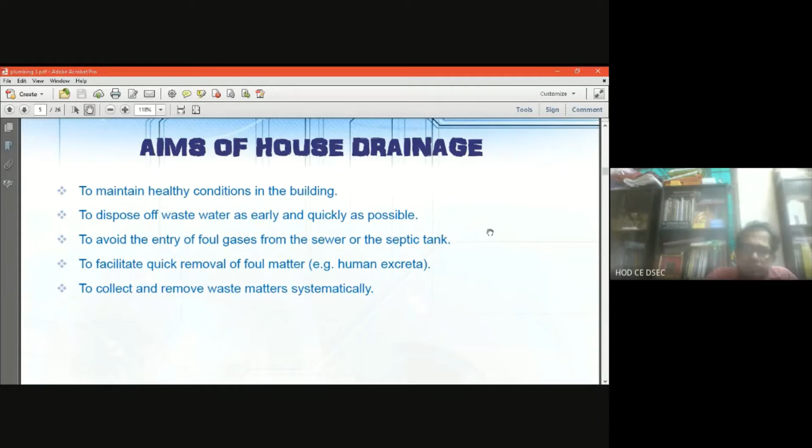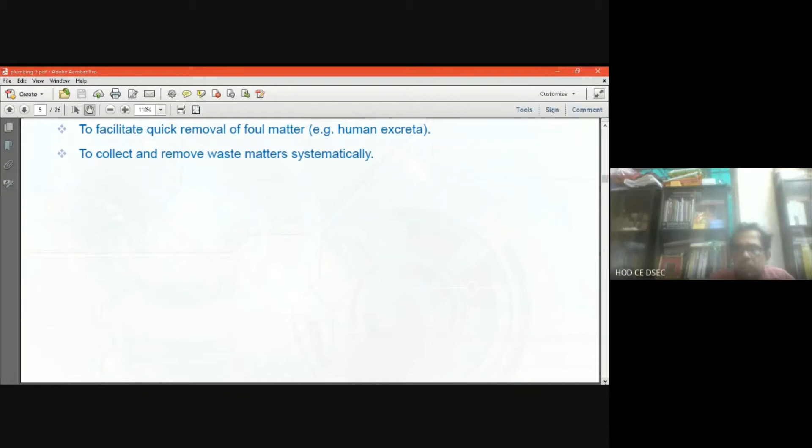Now, to facilitate quick removal of foul matter, such as human excreta and wastewater, through the plumbing facility, removal of this excreta material or wastewater takes place, to collect and remove all waste matter systematically. And after all, our drinking water is supplied through the piping plumbing system, with valves and fittings. All fittings, fixtures, and piping fall under the single head of plumbing.

Now, what are some principles you have to maintain for house drainage, the plumbing? The house drain system should preferably be laid by the side of the building to facilitate easy repair and better maintenance.

House drain joints should be leak proof, which is very important, because if any leakage is found in the plumbing work, foul gas may be emitted through this leakage. So it is very important that leak-proof joints be maintained, not only in the piping system, but also at the valve fittings and fixtures. Every joint should have leakage prevented.

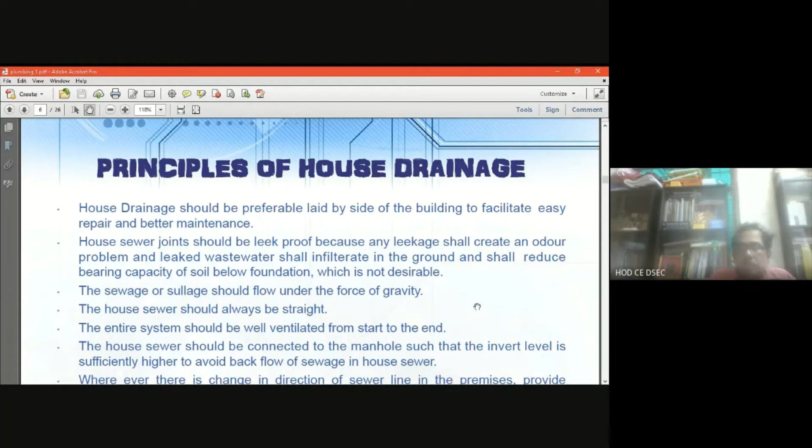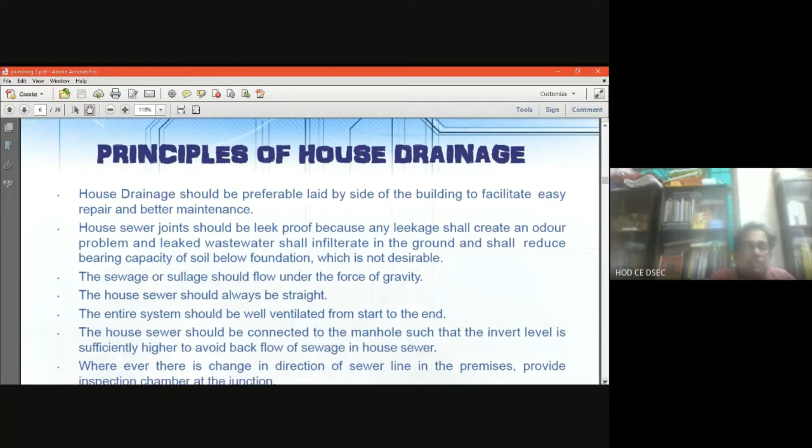Otherwise, this is required for reducing the emergence of foul gases. Now, sewage should flow under force of gravity, and the house drain should always be straight. The entire system should be well ventilated from start to end. This is one of the main principles of house drainage. There should be a ventilator pipe, that is a ventilating pipe system, along with the sewage pipe, because the entire system should be well ventilated from start to end.

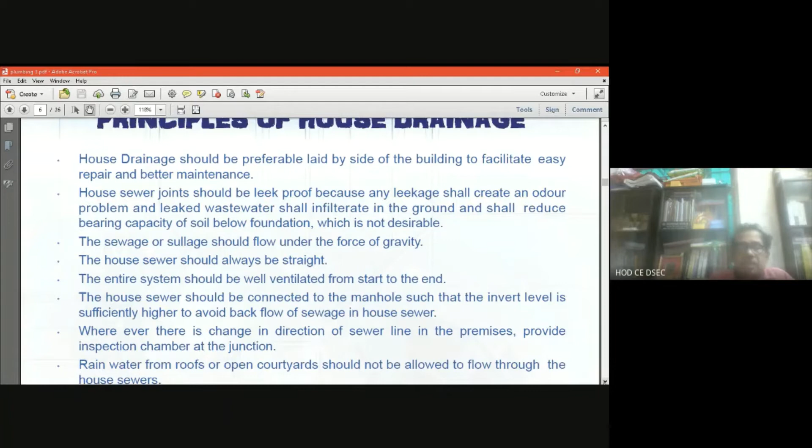The house drain is connected to the manhole or the road drain. At this connection, called the manhole, used for inspection or maintenance purposes, the invert level should be sufficiently high. Why is the invert level maintained high? So that backflow of sewage into the house drain can be prevented. Backflow of sewage in the house drain should be prevented, which is why the invert level in the manhole should be high.

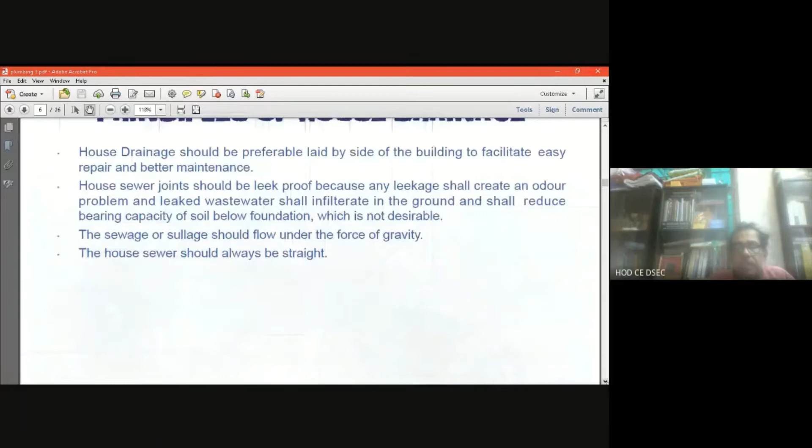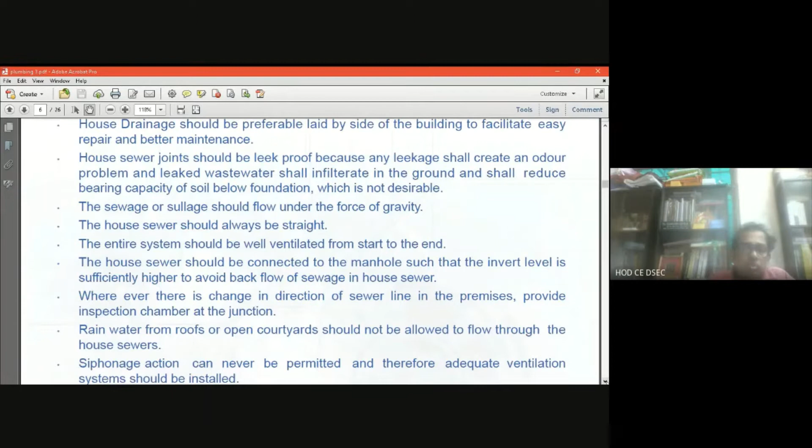Now, rainwater from roofs frequently falls on the roof or open yard. This rainwater should not be allowed to flow to the house drain directly in general, but should be flowed through the rainwater pipe to the gutter provided in the roof. Siphonage action can never be permitted, so adequate ventilation system should be installed.

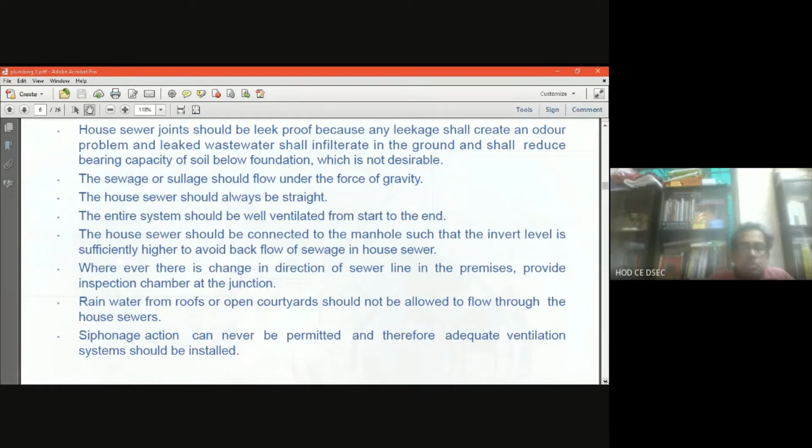So these are some principles I have told you. As I've told you at the very beginning, in plumbing, the main materials are the piping system. Apart from the fixtures and fittings, the main materials are the pipes in the plumbing system.

So we can talk about the soil pipe. What is the soil pipe? This terminology, first of all, you have to be acquainted with. Now the soil pipe is through which the human excreta flows from the cistern.

Now what is the waste pipe? The pipe which carries only the liquid waste and does not carry human excreta. So this is the wastewater, either sullage wastewater or wastewater from the toilet, like WC. This is the waste pipe where wastewater carries from the bathroom, toilet, kitchen, floor wash, and the soil pipe is where human excreta flows directly from the water closet or cistern.

Now what is the vent pipe? This is a very important pipe provided for the purpose of ventilation of the system. The vent pipe is open at top for emerging gases, and at bottom to facilitate the exit of foul gases. It is carried at least 1 meter higher than the roof level, so exit of foul gas takes place minimum at 1 meter higher than roof level, so it will have no effect on our surrounding environment. That is the object of the vent pipe.

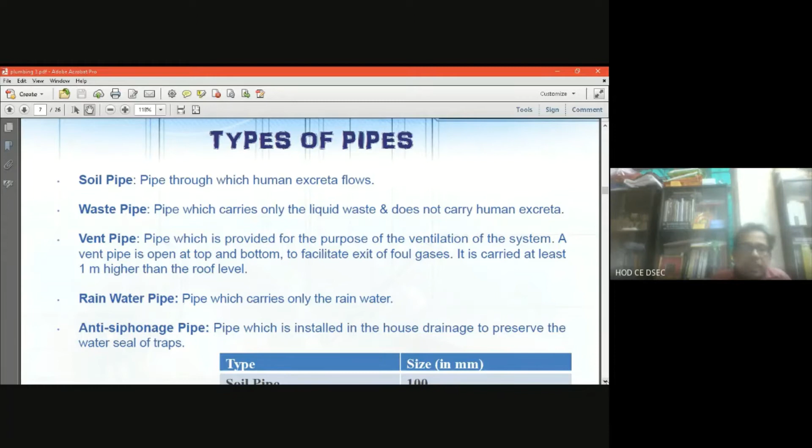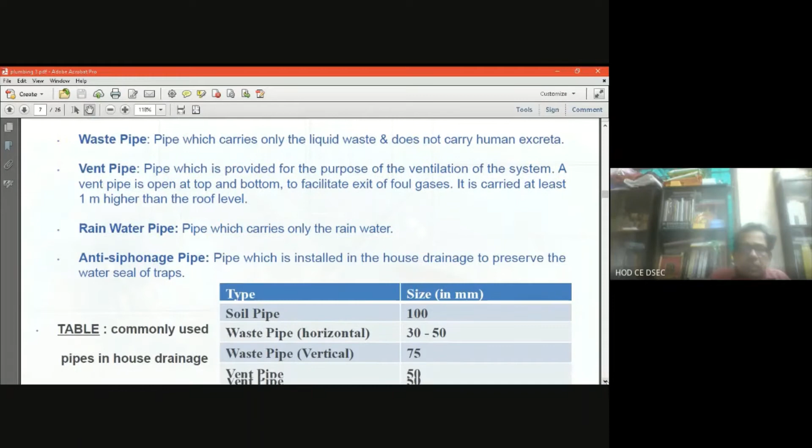What is the anti-siphonage pipe, ASP? A very important terminology which will be delivered in the next lecture. ASP is nothing but anti-siphonage pipe. These are pipes installed in the house drainage to preserve the water seal of traps. So the function of the anti-siphonage pipe is in connection with the water trap in the house drainage, to preserve the water seal of traps. I will definitely explain what the water trap is, then you will understand the anti-siphonage pipe.

Now, definitely I will tell you what the water trap is, that will be taught in the next slide. Here I need to mention that the anti-siphonage pipe was installed in the house drainage to preserve the water seal of traps, to maintain the water seal of traps.

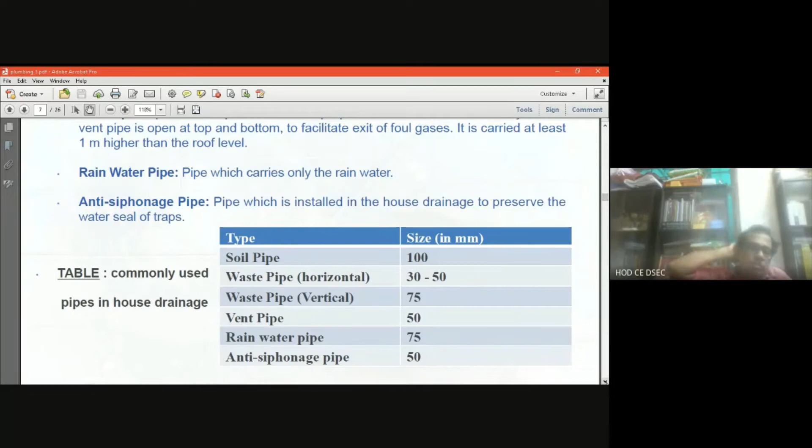Now in the table you can see the size of all the pipes commonly used in house drainage. Soil pipe is generally 4 inch or 100 millimeter. Then waste pipe, there are two types - horizontal and vertical. Horizontal size is less compared to vertical size - horizontal is 30 to 50 millimeter and vertical is 75 millimeter. Vent pipe size is generally 50 millimeter, 2 inch. Rainwater pipe standard size is 75 millimeter, 3 inch. Anti-siphonage pipe is 50 millimeter, 2 inch. So these are the commonly used pipe sizes in the house drainage system.

Now I am coming to the points of traps and their types. These are sanitary fittings. What is a trap? Let me explain - this is a depressed or bent fitting. When provided in a drainage system, it always remains full of water, thus maintaining the water seal. So traps are fittings where we maintain the water seal.

Why water seal? So that bad smell from the sewer will not enter into our premises or living place or toilet. So to avoid the bad smell, we maintain the water seal, because the water seal prevents foul gas from exiting, and this water level is maintained in the trap, which I will show you in photographs. It prevents the passage of foul air or gas through it, though it allows sewage or wastewater to flow through it.

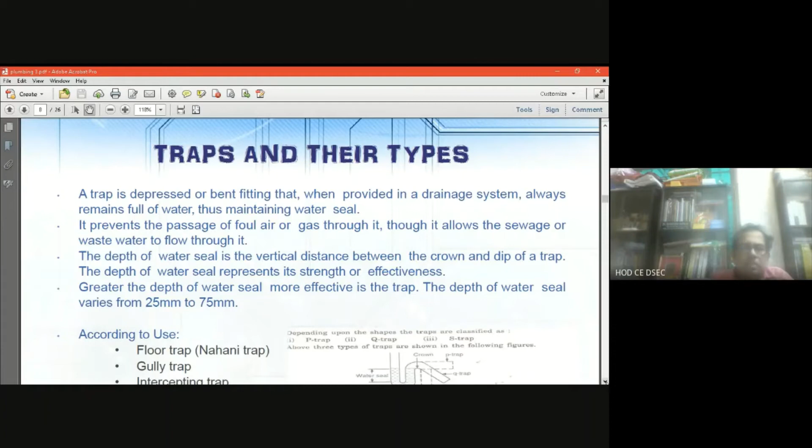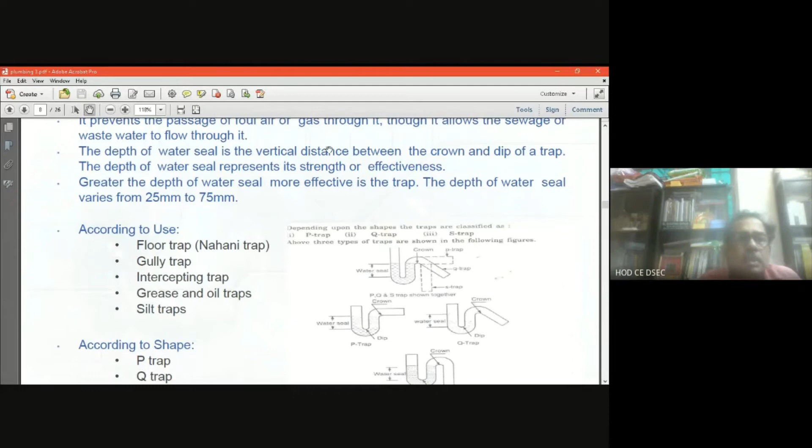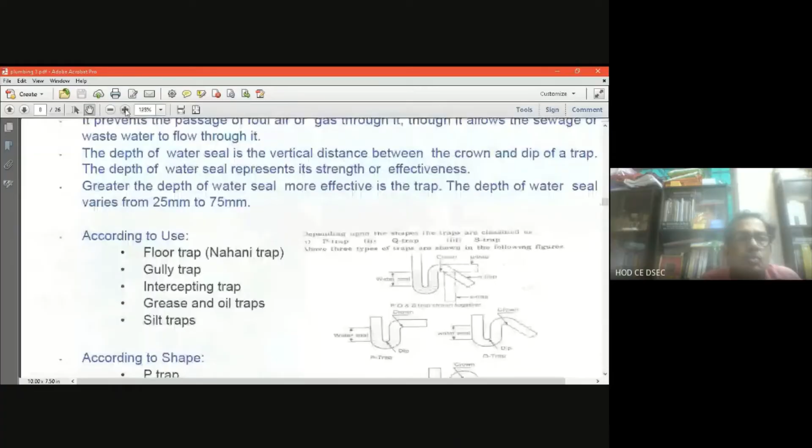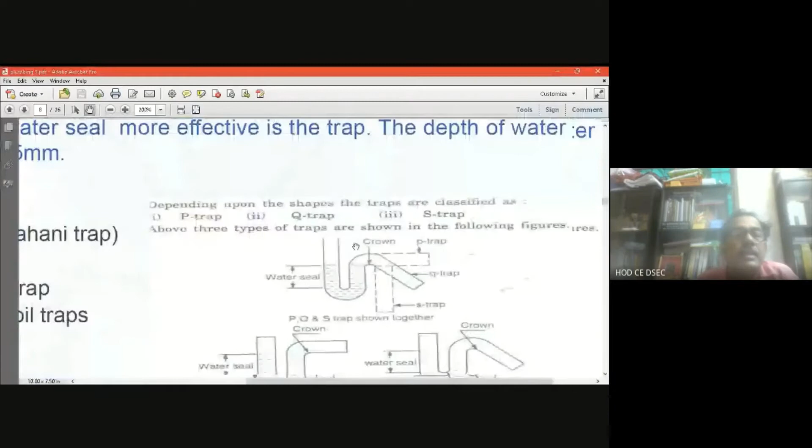The depth of water seal is the vertical distance between the crown and dip of the trap. I am enlarging it so students can clearly see this portion. Let me enlarge it first, showing the crown and the dip, then it will be very clearly understood. I think I've been able to show you in the screen sharing. I will enlarge it again so it will be further clear to you.

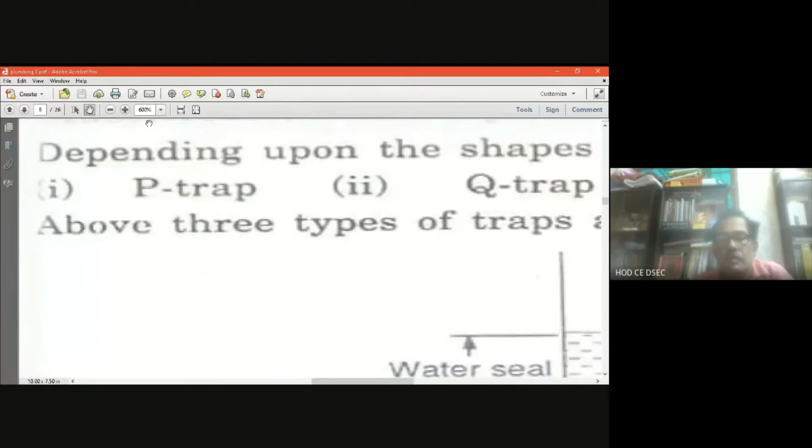You see, this is the trap, a specific trap, a P, Q, and S. One dotted line, one firm line you can see. The firm line indicates the Q trap. When the inclined oblique portion is horizontal, it is the shape of P, and when it is vertical, it is the shape of the alphabetic letter S, so it is called the S trap. Depending on the function of the trap, the shape is called the P trap, Q trap, and S trap.

So what do you mean by the depth of water seal? You see, I have shown you the crown. This is the crown portion, and this is the dip portion. The bottom portion we are technically calling the dip, and the top curvature is called the crown. Again, top of the curvature is called the crown, and bottom of the curvature is called the dip. Now the distance between the crown and the dip, that is the depth of water seal.

So what is water seal? It is the depth between the crown and the dip, and this water seal, as I am using the term, means it is sealing any type of foul gas emitting from this trap, from this sewer line. So by means of these traps, by maintaining the water depth, water seal, that is the depth between the crown and the dip, we are preventing some foul gases.

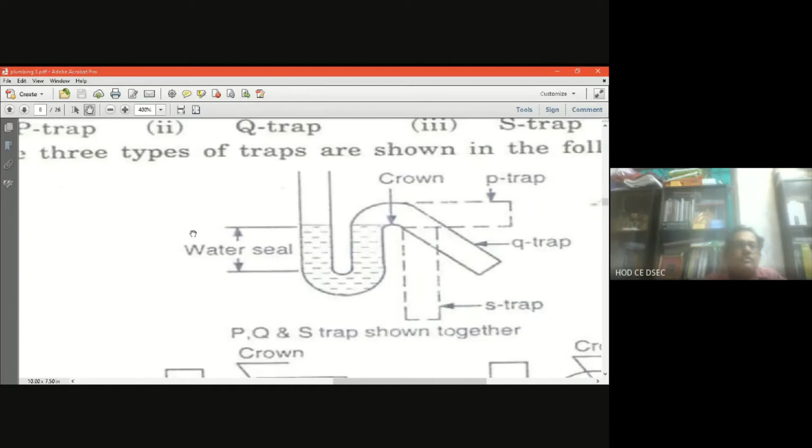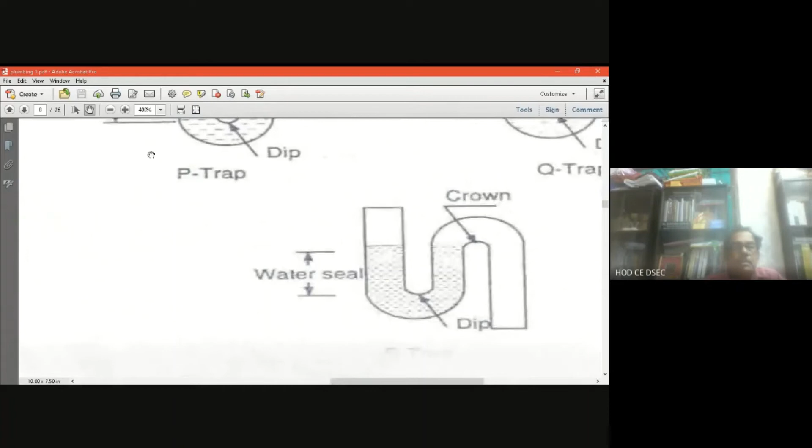And I'm showing you this is the P, Q, S, and separately also I'm showing the figure. This is called the P trap. I think I have defined already. This is called the Q trap, and this is called the S trap. These fittings, this trap, is very, very important in plumbing. So let me make a smaller view, then I can come to the theoretical part.

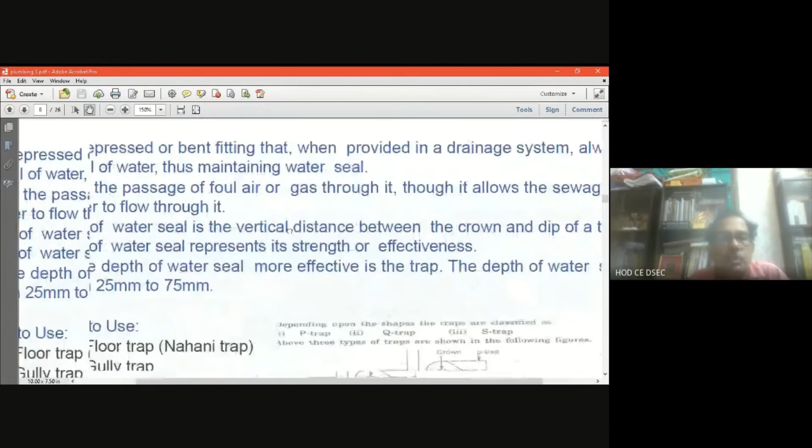So I have shown you the photograph in enlarged view. As I told you, basically the traps prevent the passage of foul air or gas through it, though it allows the sewage or wastewater to flow through it. Very fantastically, the sewage water flows through it, but it prevents the passage of foul air. By which mechanism? By maintaining the water seal, as I've shown you in the trap.

And the depth of the water seal is the distance between the crown and the dip of the trap. Now the depth of water seal represents the strength or effectiveness. Greater the depth of water seal, more effective is the trap. So greater the depth of the water seal, the more effective is the trap. Definitely, the more the water depth, the more effective the trap is in preventing the smell. That is obvious. The depth of water seal varies from 25 to 75 millimeters.

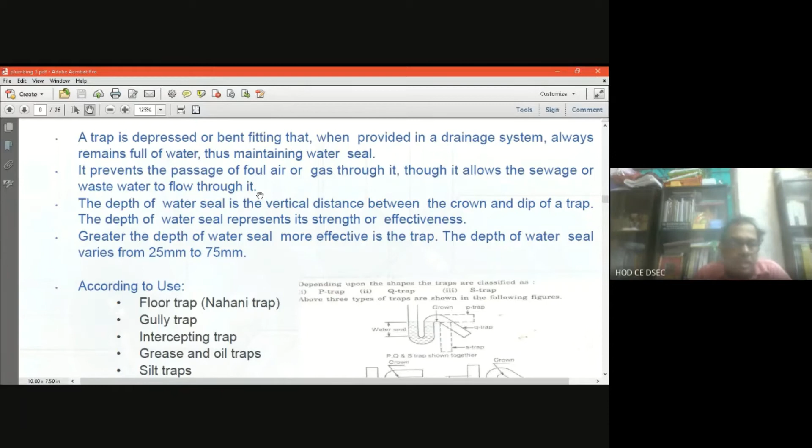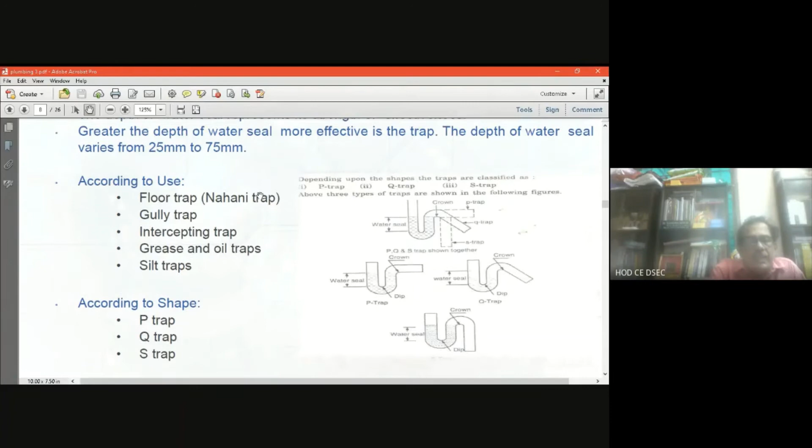That is from 1 inch to 3 inch, that depth varies. Now, according to use, there are different types. According to shape, already I have told you what is P trap, Q trap, and S trap. According to shape means according to alphabetic letter shape. If it is shape of P letter, then it is a P trap. If it is Q letter, then it is a Q trap. If it is in the shape of the S letter, then it is an S trap.

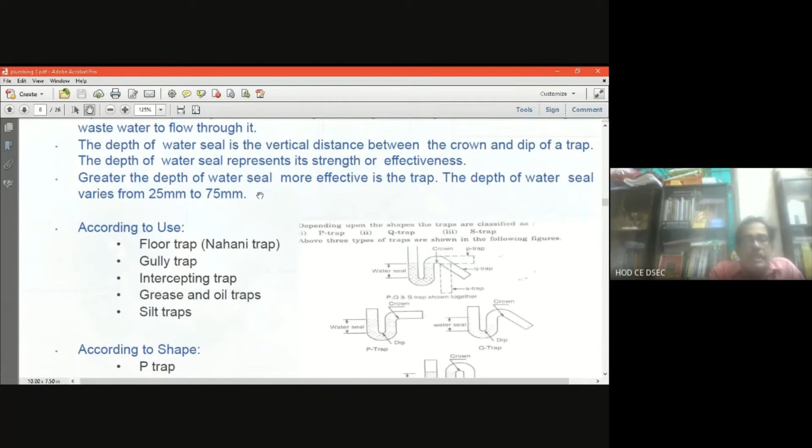So the traps are classified according to shape as P, Q, and S trap. But functionally, as per the use, the traps are classified as follows, as you can see from my lecture notes: the floor trap, alternative name Nahani trap; second, the gully trap; then the intercepting trap; then the grease and oil traps; then the silt traps. So these are the 5 traps as per usage we are following in plumbing: floor trap or Nahani trap, gully trap, intercepting trap, grease and oil traps, silt traps. These are 5 traps we are using in our plumbing fittings.

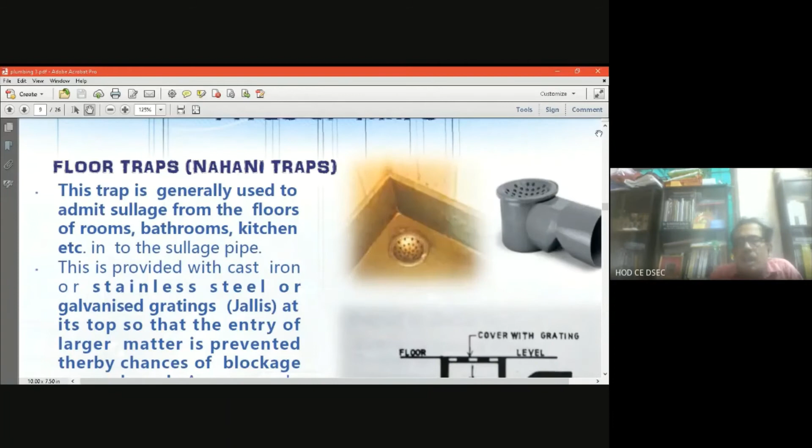Now, let me tell you what is the floor traps. You must have already seen it in your house. So when I teach you, you will learn and simultaneously go on increasing your observation of what is already existing in your house. Unless you increase your observation, your conception and practical learning will not become clearer.

So here I am giving you the photograph of the types of traps, that is the Nahani traps or floor traps. That means from the floor outlet, the wastewater is arrested through this trap. This trap is generally used to admit sullage from the floors of rooms, bathrooms, kitchen, etc. It is fitted with the floor, and is made up of either cast iron or stainless steel, with galvanized gratings or jallis at the top.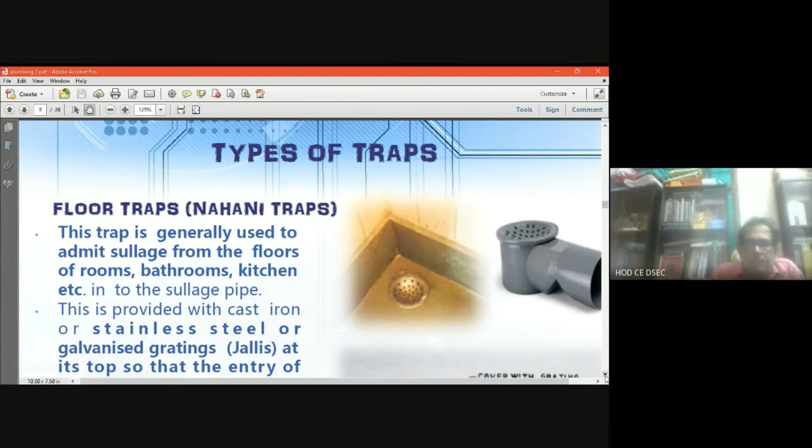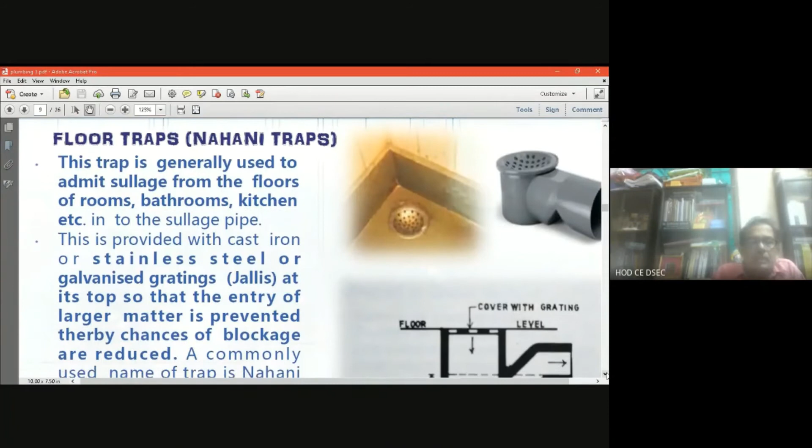At the top of the trap, where it is finished with the floor, the jalli we call the grating should be galvanized. So the entry of larger matter is prevented, and thereby chances of blockage are reduced. Because if you don't provide the jalli, larger matter will enter the trap and block the system. So galvanized gratings are placed at the top of the trap, connected with the floor.

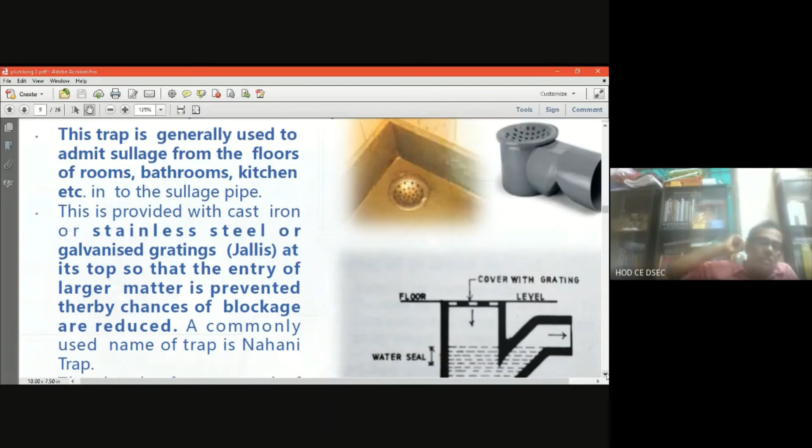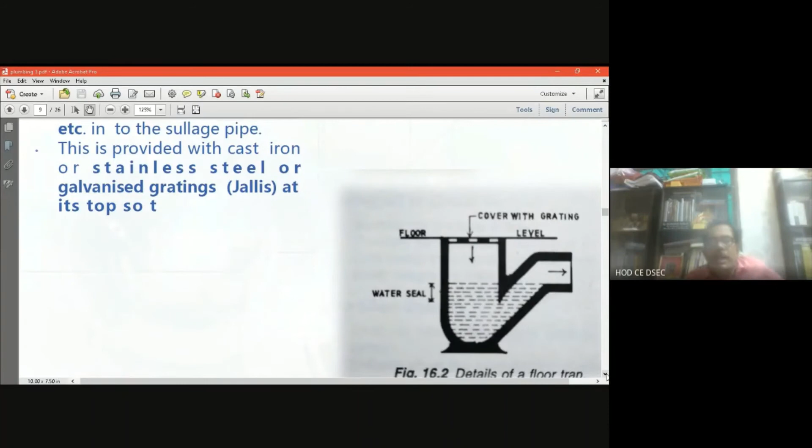A commonly used name of the trap is Nahani trap. In the photograph you see the water seal, the crown, and the dip, and it is flush with the floor level. Whatever sewage or wastewater, either from floor washing, kitchen, toilets or bathrooms, is arrested through this Nahani trap. In this Nahani trap or floor trap, generally the water depth is maintained at more than 40 millimeters. There is no maximum limitation, but minimum 40 millimeters you have to maintain as water seal on the floor trap. That is the Nahani trap.

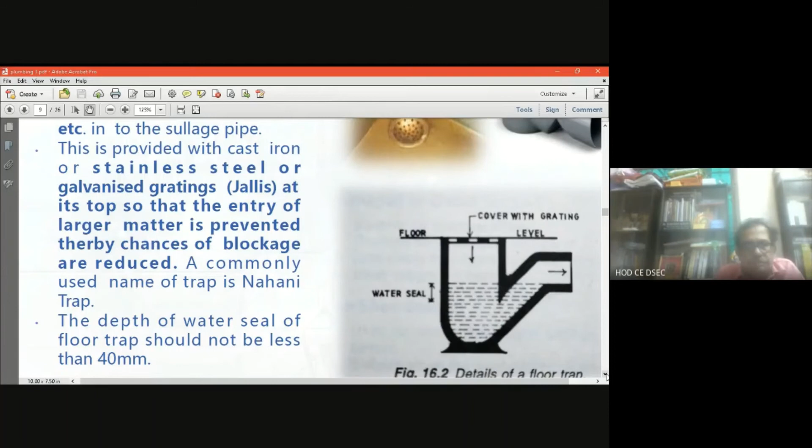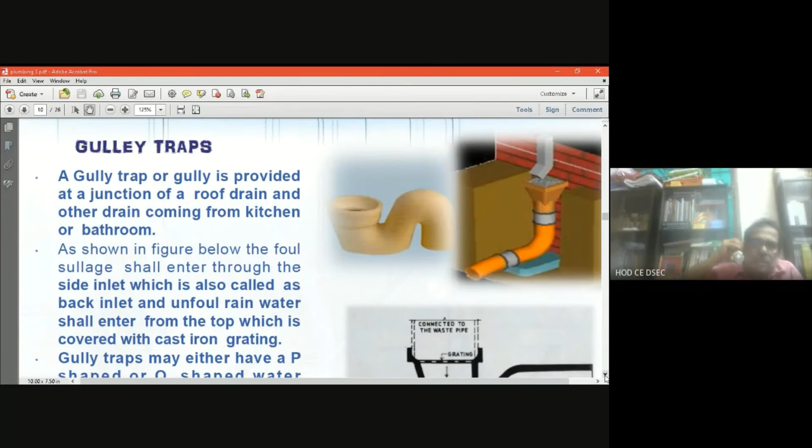Now, what is the Gully trap? It is provided at the junction of the roof drain and other drains coming from the kitchen or bathroom. Suppose rainwater comes from the downcomer, that is the rainwater pipe, and when it is ultimately connected to the drain water pipe, this connection is done through the Gully trap. Because one flow is coming vertically, that is rainwater, and another flow is coming horizontally, that is sewage water, and they should be connected in that trap, which is called the Gully trap.

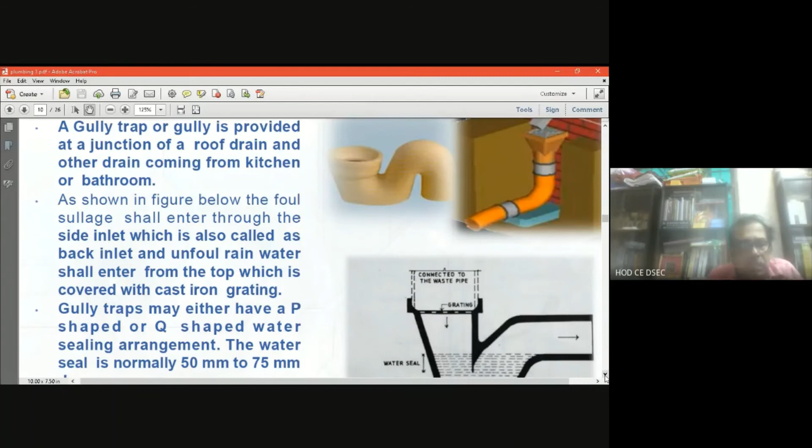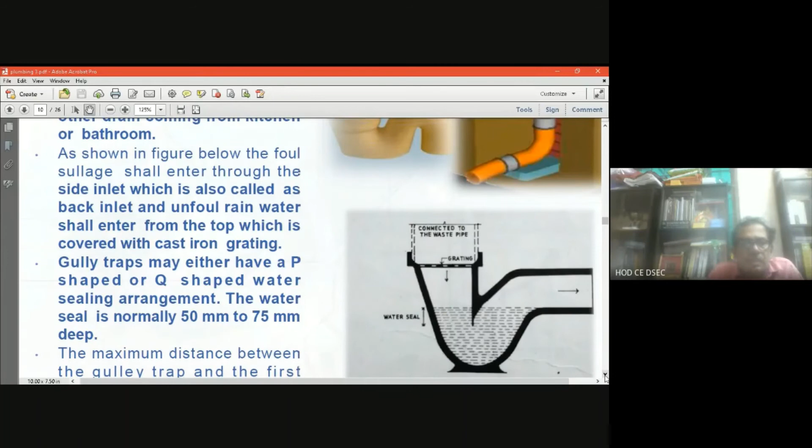So from this figure it is very clear: foul sullage shall enter through the side inlet, that is horizontal, and the unfouled rainwater shall enter from the top, which is covered with cast iron grating. So Gali traps may either have P-trap shaped or Q-trap shaped design. S-trap is not possible for the Gali traps.

As far as utility is concerned, the water seal is normally 50 to 75 millimeters deep, and it is maintained. The maximum distance between the Gully trap and the first manhole should be 6 meters. Again, the maximum distance between the Gully trap and the first manhole should be 6 meters.

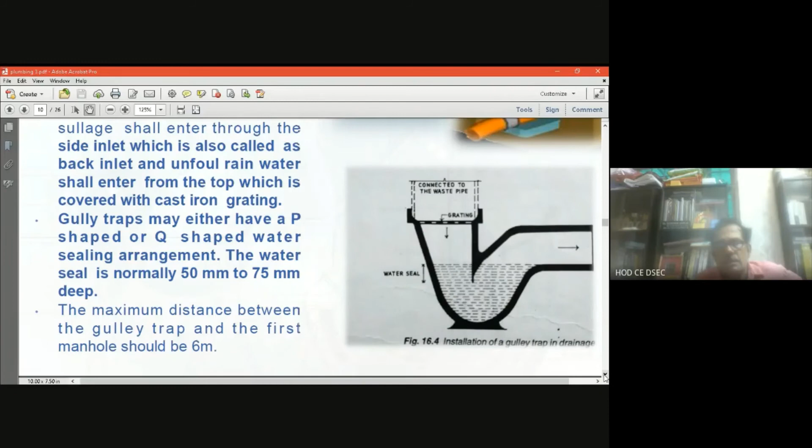Now I am coming to the point of intercepting trap. Very often you are using these traps. Intercepting traps are provided at the junction of a house sewer and the municipal sewer. Suppose our building's house sewer is there, and it has to be connected with the road municipal sewer. There will be a junction at the connection point where the house sewer is connected to the municipal road sewer. So for preventing the entry of foul gases of the municipal sewer into the house drainage system, intercepting traps are provided at the connection of the house sewer and the municipal sewer.

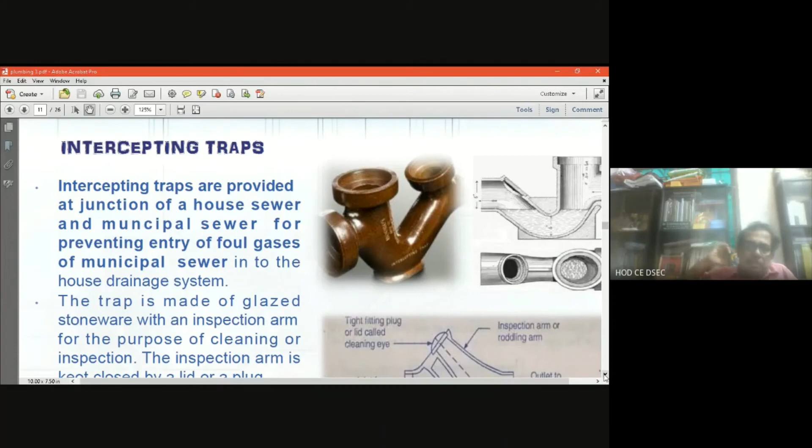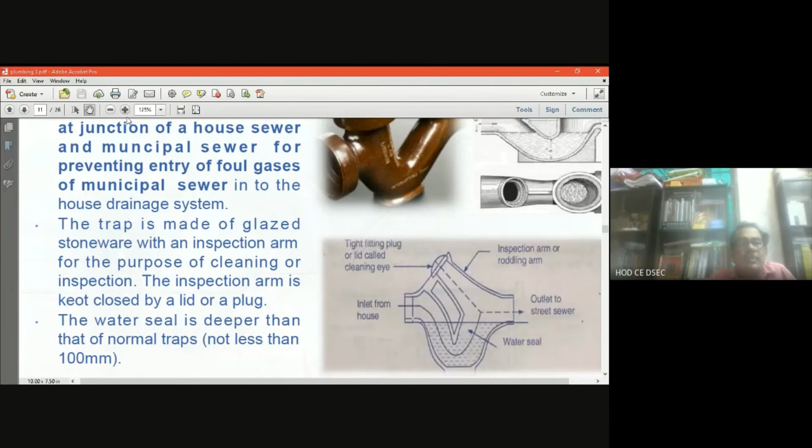And in the photographs I am showing you, very interestingly, I want to show this in an enlarged view, then we'll get the full picture. Just a minute, let me enlarge the view. Fine, you see the photograph - this is the intercepting trap. Very interesting.

Now, the horizontal portion on the right side is shown as outlet to street sewer, and the left portion is inlet from the house. Two things have to be connected: inlet to the outlet of the street sewer. How? Through this intercepting trap. And here is the speciality of this intercepting trap.

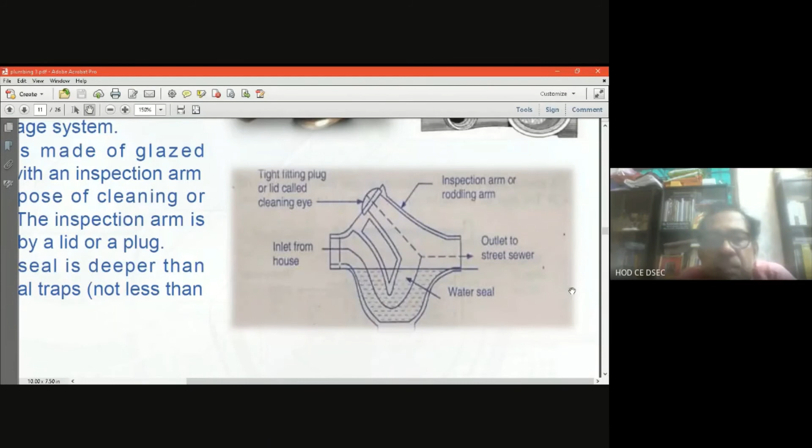From these photographs, we can see that there is an inspection arm or rodding arm. Why is this arm provided? Because of maintenance purposes in the road sewer. So this inspection arm, and above that a tight fitting plug or lid called the cleaning eye, is placed.

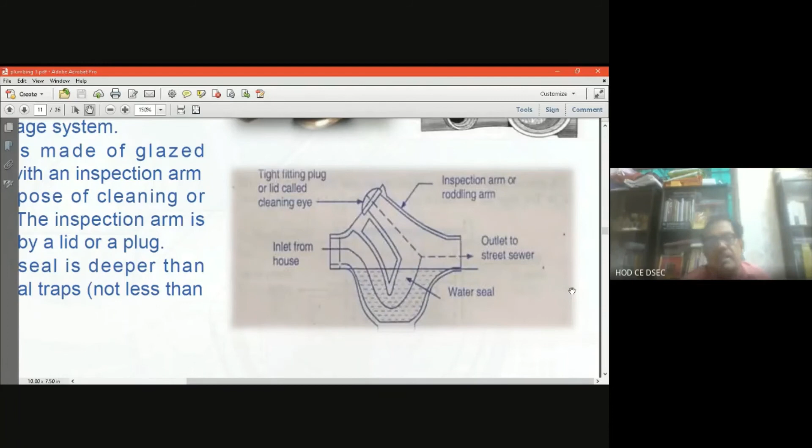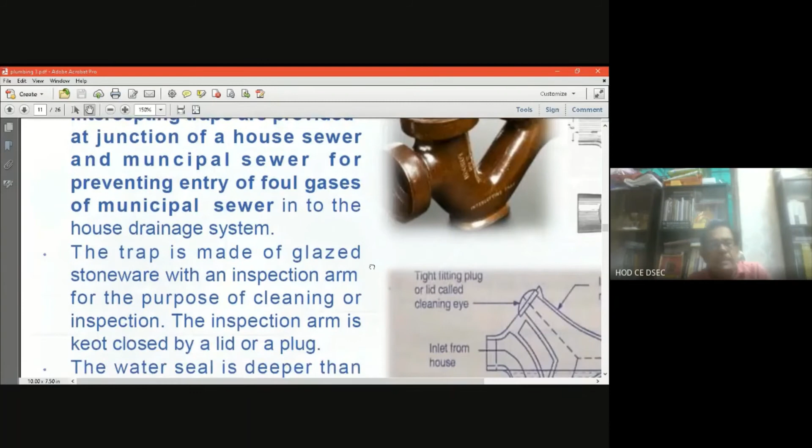So I have given you the sketch, I have given you the photograph exactly how the intercepting trap looks. The trap is made of glazed stoneware with an inspection arm, as shown in the photographs, for the purpose of cleaning or inspection. The inspection arm is kept closed by a lid or a plug.

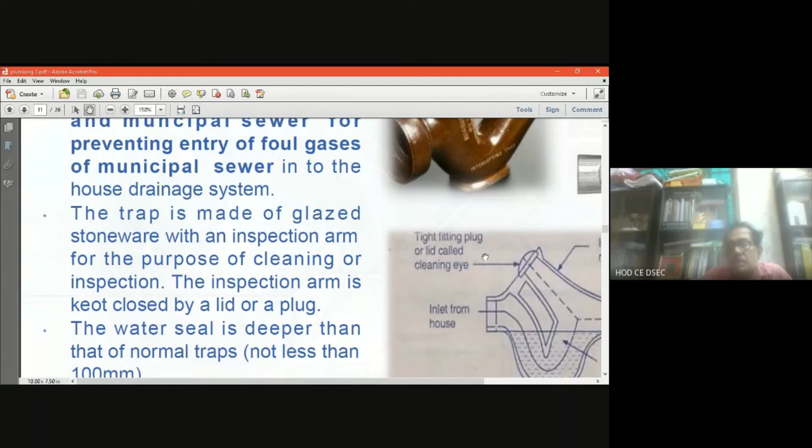The water seal is deeper than that of normal traps because its role is very vital. Why is the depth of water deeper in this particular intercepting trap? Because it prevents foul air from the road or municipal sewer from entering the house. So the depth of the water seal is maintained in the intercepting trap, with a minimum of 100 millimeters.

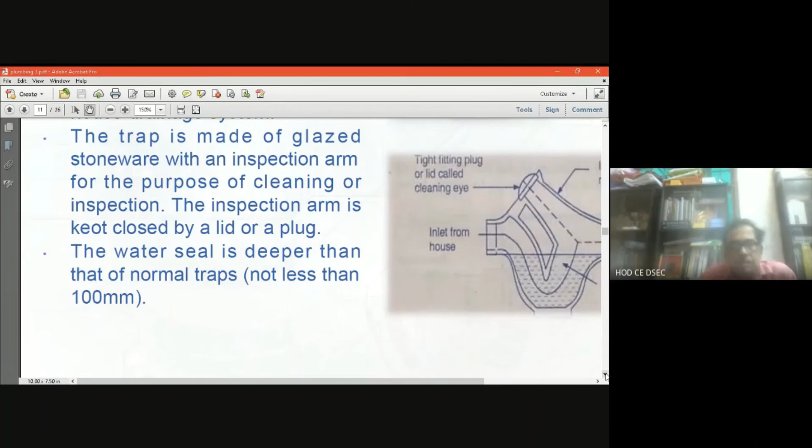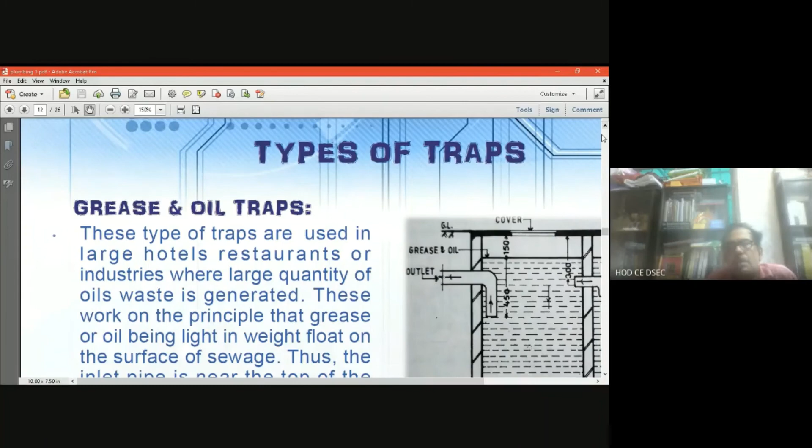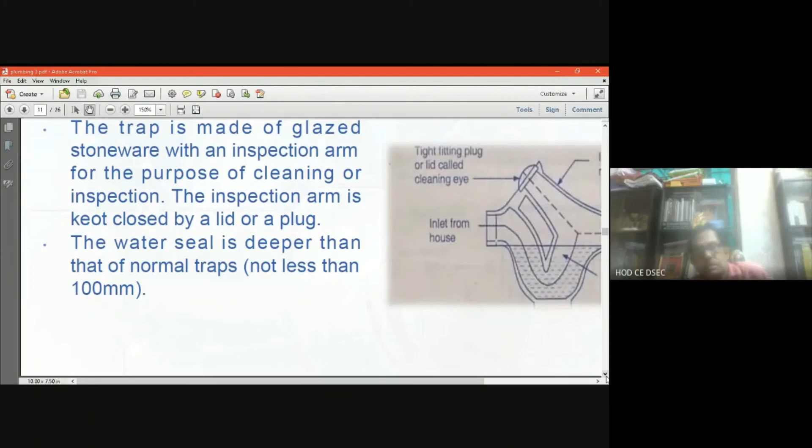Next I am going to tell you about another type of trap, the grease oil trap. Let me first explain the theoretical part, then show the photograph. These oil traps are used in large hotels, restaurants, or industry. So I am giving examples of plumbing not only in household premises, but also in commercial and institutional settings like hotels and restaurants. In industry, a large quantity of oil waste is generated.

These traps work on the principle that grease or oil, being light in weight, floats on the surface of water. Thus, the inlet pipe is near the top of the chamber and the outlet pipe is near the bottom, because the bottom outlet lets the clear water go out while the grease and oil collect at the top. This way the separation can be achieved.

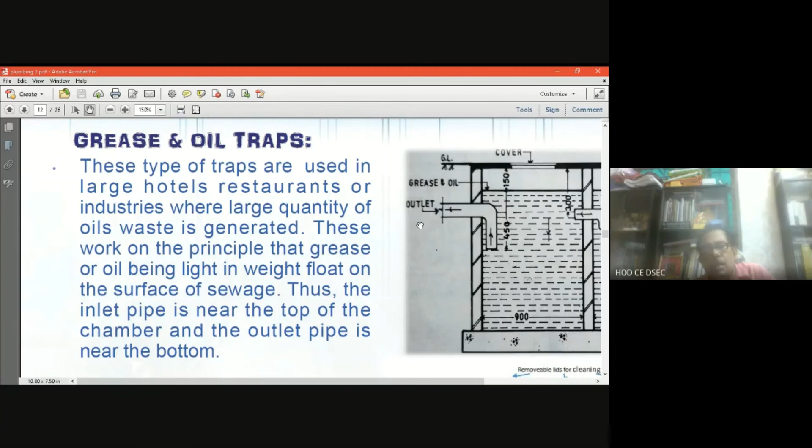The outlet is at the bottom, and the top surface holds the oil and grease, since their density is light compared to water. So the oil and grease float on the surface, while the clear water leaves through the outlet at the bottom. This separation happens because the lighter material floats to the top, so the inlet is provided near the top while the outlet pipe is near the bottom. Now let me show you the photograph.

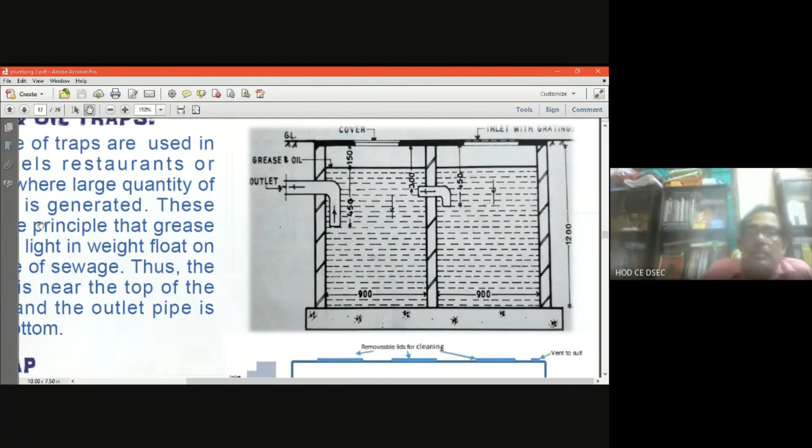This is the grease and oil trap. We can see the grease and oil remain on the top surface of the water, with the inlet at the top and the outlet at the bottom. So this is how it works.

Now next I am going to the silt trap. These are provided only in situations where the wastewater carries a large amount of silt, sand, grit particles, etc. This silt trap is a masonry chamber, a large manufactured chamber, where the inlet and outlets are provided at a higher level so that the silt and sand settle down.

This is the reverse of the earlier case. Earlier, the oil and grease were lighter so they floated up; here, the silt and sand settle down. So we have to maintain both the inlet and the outlets at the top, provided at a higher level, so that the silt and sand can settle down.

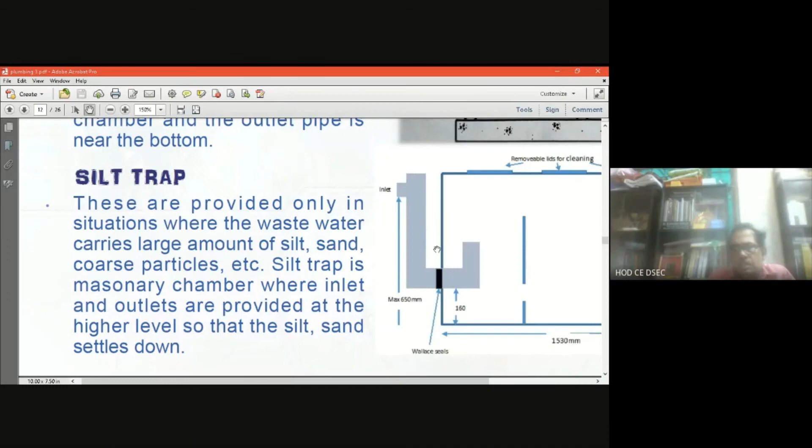This way we can remove the silt particles from the wastewater, so that before going to the treatment plant, these particles do not damage the devices and systems in the treatment plant.

This continuation of Module 7, building plumbing, will continue in three subsequent lectures, since as per the syllabus this module covers four lectures in total. Today I have given you the first lecture, but the second, third, and fourth lectures are yet to come.